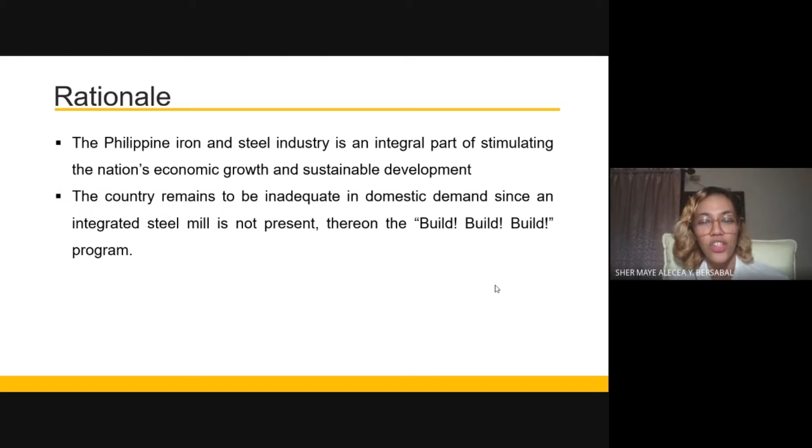Now, let us proceed to the presentation and discussion of the conceptual framework. To establish an ISM, we need to evaluate the requirements of the steel production chain, such as the availability of raw materials, the iron and steel making processes, the labor and skills needed in the operations and production of steel, and the enabling environment that will support the establishment of an integrated mill.

So, what is an ISM? Integrated steel mill is an energy and mineral-intensive industry that manufactures iron and steel using primary raw materials such as iron ore, limestone, and coal. In many mills, scrap steel is the secondary material to remake iron and steel.

For the raw material requirements, the primary resources for steel production are coal, iron ore, and limestone. And the secondary material in many mills is scrap steel. Coal is the main source of carbon for energy and heating and is used to produce coke. Iron ore is the metallic mineral used for making steel, and limestone is the fluxing substance to make slag that removes impurities in the production.

So for iron and steel making processes, it involves various production machinery that produces semi-finished and finished steel products. It consists of a sinter plant, coke oven, blast furnace, basic oxygen furnace, electric arc furnace, continuous casting machine, rolling mills, and steel finishing. The process starts with the raw materials being charged into the sintering plant, converting the raw materials into an agglomerated product for the blast furnace.

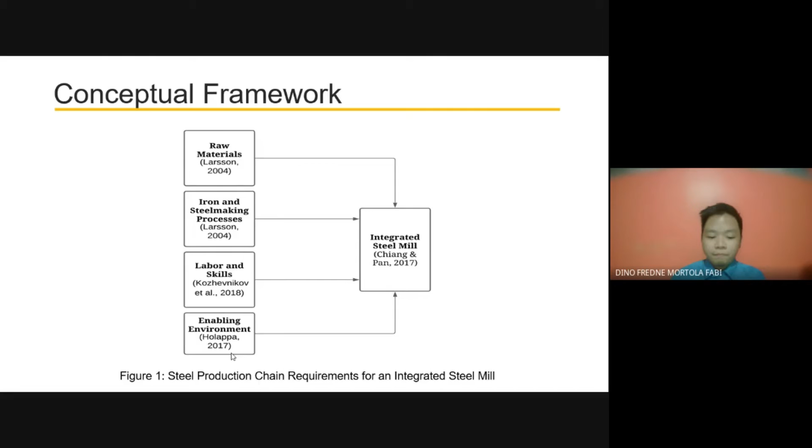And now, let's proceed to the statement of the problem. In light of the increasing demand of steel, the primary objective of the study is to evaluate the production chain in the Philippine steel industry.

The study aims to analyze the available raw materials and also to identify if there are available training courses offered in the country so that we can tell if we're ready for an ISM, or integrated steel mill, in comparison to other major steel producing nations.

The present study also shows the volume of crude steel production, imports and exports, apparent steel use, which lays the foundation of the current competitive position of the Philippine steel industry, which in return allows the nation to create an edge over the competitors in the market.

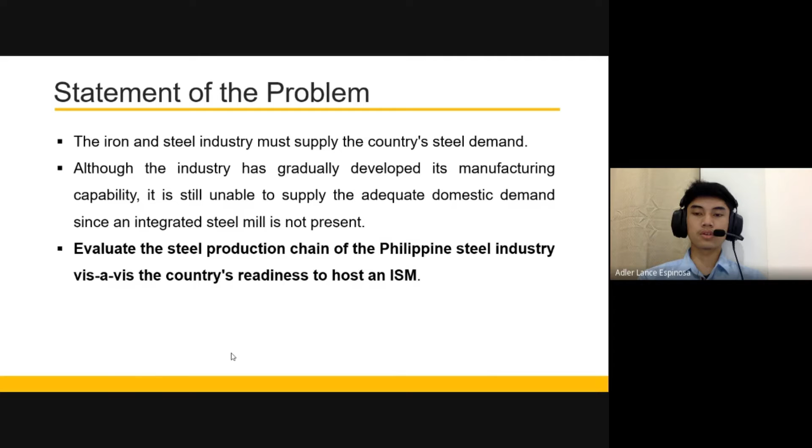In the next slide, we will be talking about the significance of the study.

By achieving the objectives of the study, it mainly helps identify the viability of establishing an integrated steel mill in the Philippines, and through that, it also helps realize the vision of the Philippine Iron and Steel Institute that by 2030 the industry will be the major producer of safe and high-quality steel products for 70% of the domestic market, and manufacturing world-class products for the industry.

And the study may also assist in the growth and the crafting of policies for the Philippine steel industry. Furthermore, the steel sector outputs are the necessary inputs for infrastructure construction. Thus, the discussion on this paper will help achieve the goals of the Duterte administration's Build Build Build program, which aims to usher the Philippines' golden age of infrastructure.

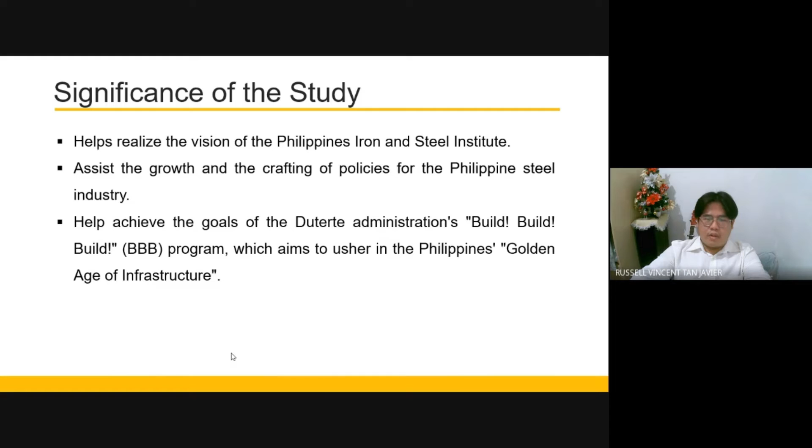So, for the next section of the presentation, we will discuss the research methodology. Now, let us take a look at the research methodology. The study adopts a qualitative case study approach.

Now, I would like to briefly mention the study's data sources. Firstly, the key informant interview and focus group discussion. The data collected were transformed by acquiring an intelligent transcription, which was then subjected to an analysis to elaborate, organize, and interpret the results based on the well-defined research objectives.

Secondly, the current steel production processes in the Philippines, compared to that of major steel producing nations, were acquired from an internet based data collection.

Thirdly, in identifying the available raw materials and courses or training needed for steel production in the Philippines, the researchers collected data through KII, FGD, Mines and Geosciences Bureau, and Department of Energy.

Lastly, the data for the current position of the Philippine steel industry in terms of the volume of crude steel production, imports, exports, and apparent steel use was collected from the World Steel Association Steel Statistical Yearbook, years 2010 to 2019.

Next, these are the research instruments utilized in the study. The study utilizes a set of questions that served as a primary data collection tool for the key informant interviews and focus group discussions. Lastly, we have the video conferencing software, which was the medium for synchronous communication, and it was also utilized to obtain data from the online interview.

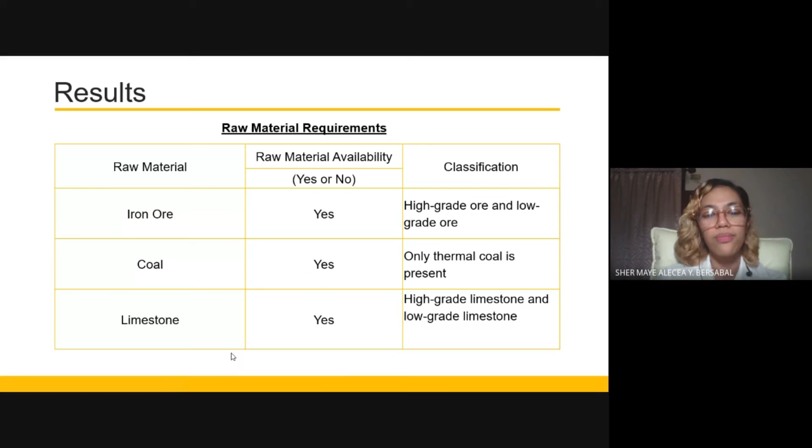Next, we have the steel production processes of top steel producing countries and the Philippines. Top steel producing countries ranked by the World Steel Association in steel manufacturing, such as Germany, China, South Korea, and Japan, have integrated mills covering sintering, coke oven, blast furnace, basic oxygen furnace, electric arc furnace, continuous casting machine, rolling, and steel finishing. On the other hand, the Philippine steel industry consists of only a sintering plant, electric arc furnace, continuous casting, rolling, and steel finishing.

However, certain developments are initiated by one of the Philippine steel manufacturers, namely Steel Asia, investing 100 billion pesos for the next 5 years in developing their steelmaking range, with a plan to establish an integrated steel plant to produce sufficient products for the demand of the country.

Even though the Philippines doesn't yet have an integrated steel mill, there are steel products produced locally, such as angle bars, beams, and other medium steels in Batangas, while Bulacan and Cebu produce reinforcing bars and wire rods. Steel Asia, Pag-asa Steelworks Incorporated, Capitol Steel Corporation, and Cathay Pacific Steel Corporation are long steel producers, while Puyat Steel Corporation, Sonic Steel Industries Incorporated, and Phil Steel Group produce flat products. Long products are finished steel made from billets or blooms, while flat products are finished steels made from slabs.

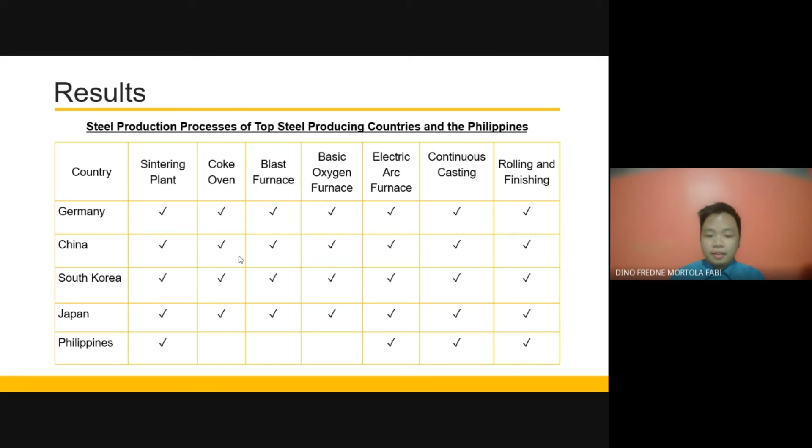Now let's proceed to labor and skills. Steel Asia Manufacturing Corporation and Germany's Badische Stahl Engineering have collaborated to create a world-class training facility in southern Luzon. Steel Asia and BSE have committed to ensuring that the training facility will develop future steel industry workers. The steel industry requires labor and skills in steel production to operate steelmaking machines and produce high-performance steel.

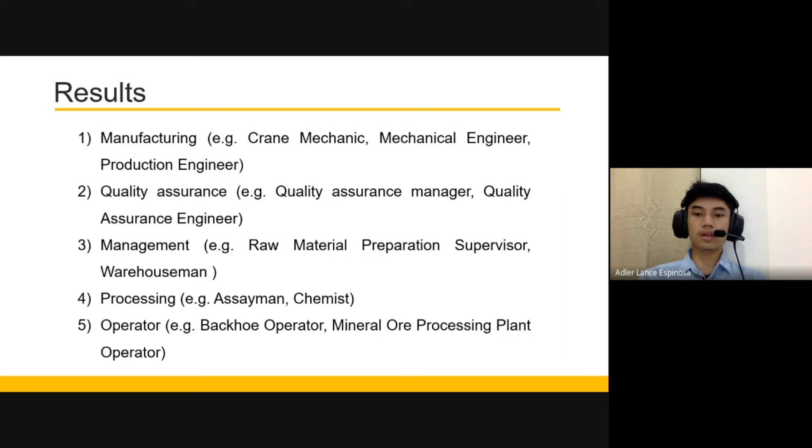To further understand, we will explain the current climate trend of the consumption of steel in the Philippines for the last 10 years. The crude steel production, apparent steel use, and imports and exports of semi-finished and finished steel products will also serve as the industry performance indicators.

Now let us proceed to the conclusion of our study. By way of summary, the Philippines has gradually developed its manufacturing capability, yet is still unable to supply the domestic steel demand since an ISM is not present.